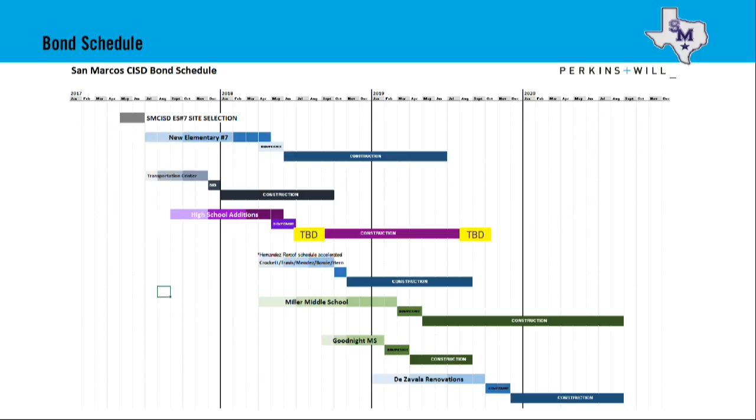With Miller, like I talked about, we're really jumping into the phasing. So this one's a tricky project. As you can see, the front of that building looks completely different. How are we going to address the front door? How are we going to address parking? Where does staff come in? Where do buses come in?

So we're starting to have initial conversations with the contractor. And then we're going to schedule a meeting and talk about that with campus staff and really start to dive into that, because this one is probably the most extensive on additions and renovations. We're demoing a portion of the building, so where does administration go? Some of those things that we need to jump into.

So by next month, when we give our design development presentation, we'll have a little more of that refined for you guys. I think the biggest thing is we've been meeting with the city quite a bit, making sure they understand the scope of work, so that when they're reviewing the drawings for permits, they know what's going on.

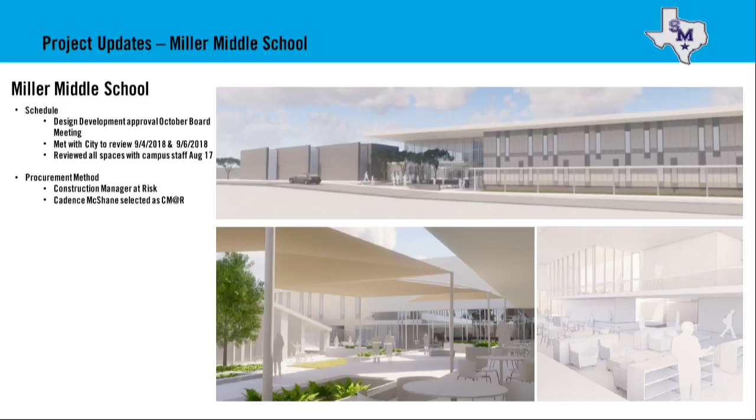And we had a great design development meeting with every single department. We went into the layout of lockers. We got into a lot of the details - the layout of all the science rooms, where the sinks sit, where fume hoods need to be, where safety showers are in science labs. So we really got into good detail on that, and we'll be able to show you more next month.

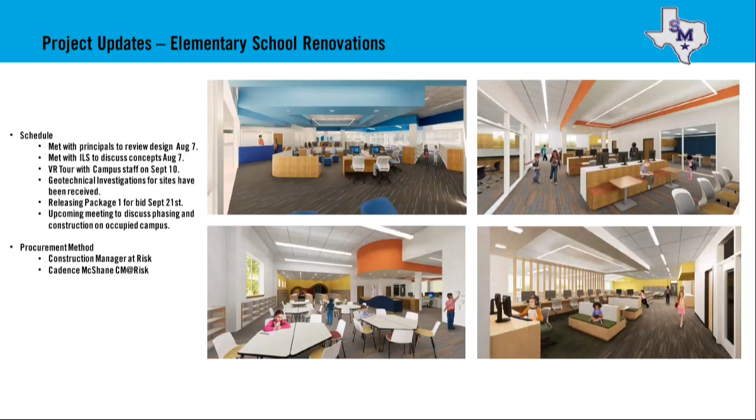Project updates for the elementary school - I'm going to present the design development package tonight, and I'll get into that one in just a moment.

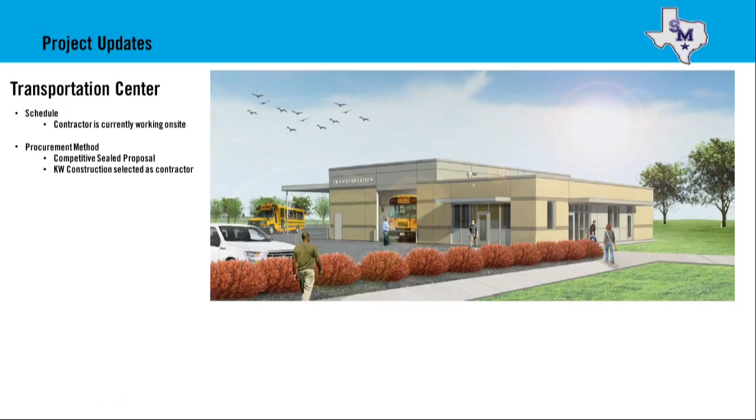And then the Transportation Center - KW Construction couldn't be here tonight, so I'm just going to give a brief overview of where they are. I tried to get an overview of the site. You can see most of the concrete parking for the buses is already in. They've been delayed by rain quite a bit, but you can see they're still trying to make progress on the exterior. They're getting all the flashing and everything ready for those windows in that picture there. That black portion, that band, is a metal panel band that'll be going on next once the roof is fully installed, so they're still making progress.

And Cindy and Jay have been going to every single job site meeting. They know what's going on out there, so they've been really on top of it. And then I'm going to let Weber come up here. We'll let them come up - you want to come up and give a quick update? Okay.

Were the easy ones this time? That's us.

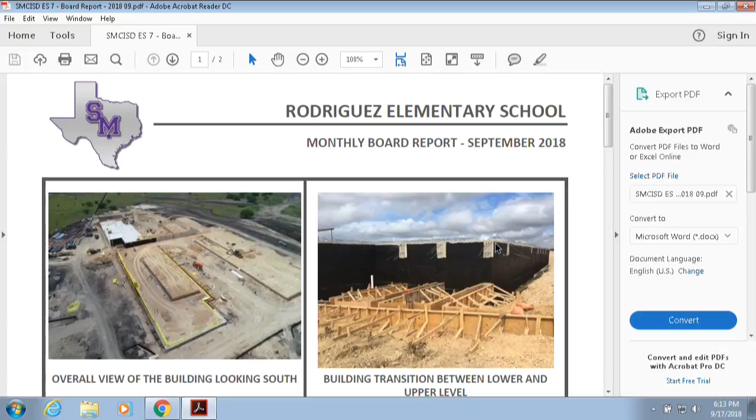So, yeah, just right quick - what you see on that picture on the top right is the building transition between the lower and upper level. We started the waterproofing and the French drain. The forming is actually for the stiffeners and beams that tie the wall to the upper level.

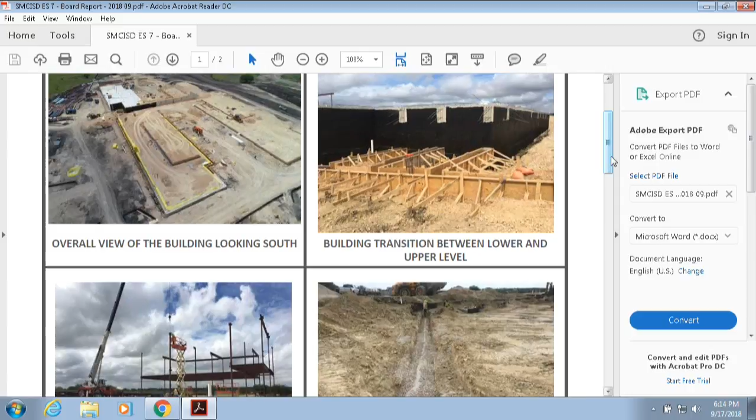And then on the 2-story level structural steel, we've been able to get about 42 pieces of steel a day, so moving pretty good. Have you been out there recently? Yes sir, we're out there every day.

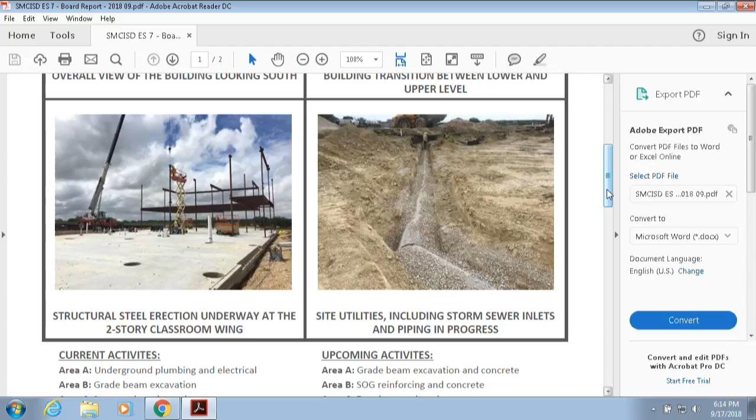Were there any surprises in how the site took water? For the most part it's draining and doing what it should be doing with our temporary erosion controls. We did do a rough cut of our parking lot up close to our construction trailer, so that did hold some water, but we've been out there pumping Saturday and Sunday.

I guess the storm that came through yesterday didn't really help, but we've had multiple pumps out there pumping down towards the detention pond, the temporary pond. So it's still on time at the moment. Yes sir. All right, thanks.

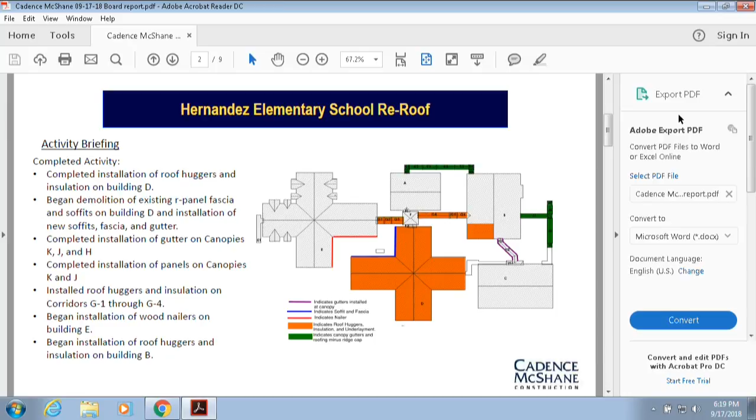Here's some pictures to give you an idea of what I just explained. This is building E, and the gray material you see is the membrane that's already installed. This is ready for the roof panels to go on.

Here I'm showing you the installation of the new soffits. If you recall in the previous picture, the soffits were blue. These are the new panels that go in, and this is the color that's been selected. Again, this is at Building D.

Here is the cafeteria. As you can see, on the right side of the picture there's a portion of the gray area, and on the left you see the panels that are on ridge, the ridge panels. This indicates we've installed the membrane on the right side and are working our way to the front of the building.

Here you can see the roof hugger system and the installation in the corridors, the connector corridors at G5 and G6.

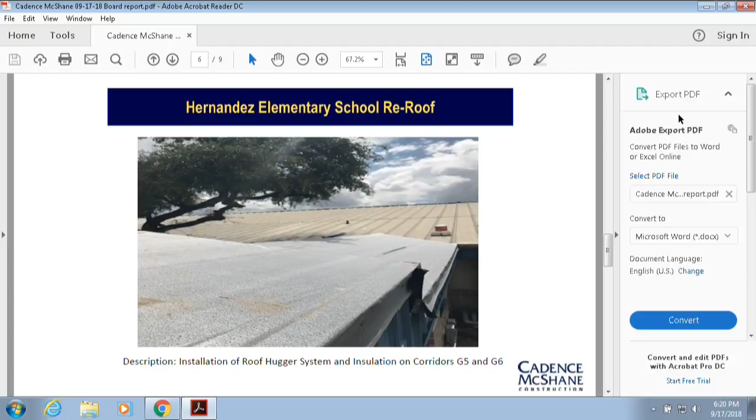Here what I'm showing you at Building E is the installation of the wood nailers. If you look above the blue trim, you can see the wood nailers being installed. That's what the gutters affix to.

Just to give you a briefing on where we stand on the schedule, we took a bit of a hit with the weather. The past week and a half, we've been working around the rain, and in working with the school on noise, we've had to restructure how we go about installing these panels, which has delayed the project just a little bit. So right now we're looking at completing the last building in early December. There's some cleanup and punch list work that happens after that, so we're projecting we'll be completely done before Christmas.

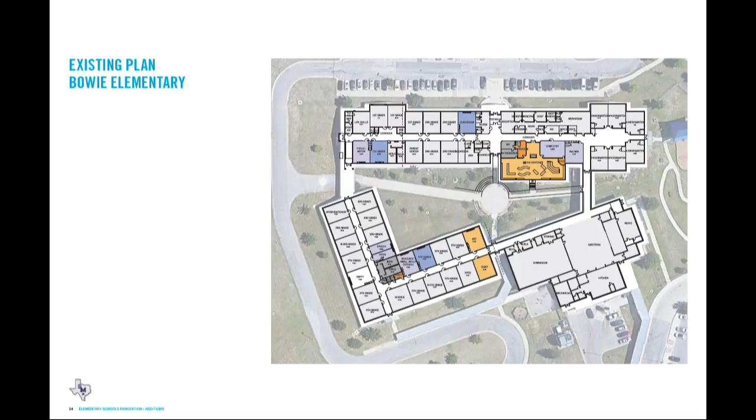Just a quick recap of each campus and the overall scope. At Bowie Elementary, we're doing a 4-classroom addition, in the top left-hand corner here. We're doing a full renovation of the library. Part of that renovation, and this goes for all campuses, is we're going to fully renovate the space, provide a community conference room, a maker space and lab, and also provide the same support spaces that we're doing at Rodriguez Elementary School, so everybody district-wide will have the same types of support spaces across the board. And then also creating a new art lab, a flex space, and some smaller intervention spaces.

We've always talked about being more efficient with the layout, so we're actually taking some of these larger classrooms and subdividing them so we can get classes of 4 or 5 without taking entire classrooms - we can dedicate that to larger classrooms. It allows more flexibility for principals and scheduling in the future.

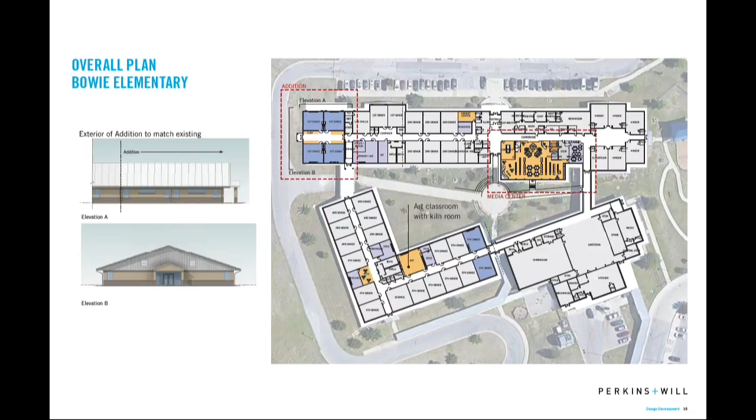In the media center, very typical across the board, we're creating that technology-rich zone. We have areas for our research computers, but also we work in groups now. The kids are not just going to be there by themselves. We're creating space next to each other so you can have two kids at one computer, with little bump out spaces in the middle so if I need to write something down, I can turn around and tell my friend, hey, write this down for your project. So we're creating it not just as a work zone, but making it more interactive spaces.

We also have our teaching spaces. Our media centers, our libraries are not just places for storing books and researching on computers. They're teaching how to research in those spaces. So we have a teaching zone as well that has a projection screen that can also be used for staff meetings. We have a large presentation space, more of that Kiva style space, where they wanted to create an intimate space where they can still read to students.

And then we have more of a personalized, individualized space in the green. Those are the little carrels or little nooks that the kids can climb into, get comfortable, and do some personal reading in a quieter space.

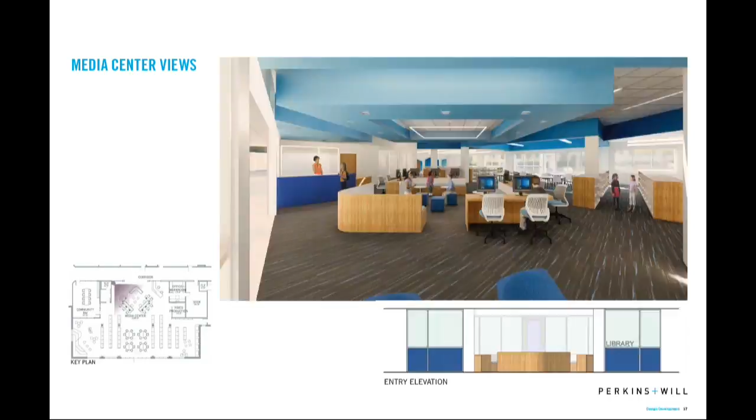And I think we can show you here in this view. So this front area here is that technology zone. We have our circulation desks still. And then in the back here, you can see some of where we're able to bring in some of those nooks. Here's a better picture of those little nooks - they're just little recesses that kids can climb up into and read. Here's our teaching zone in the front here.

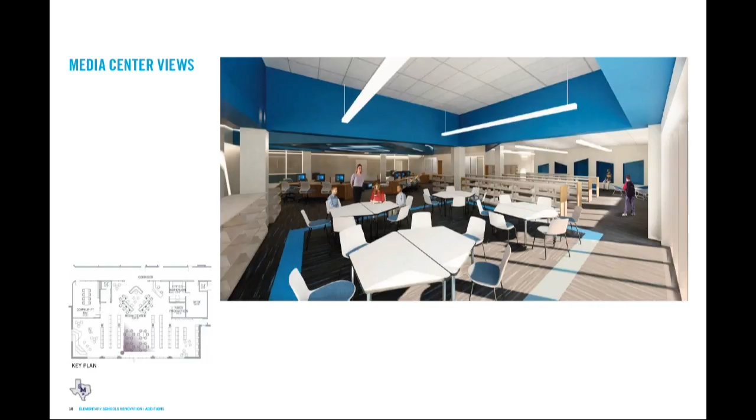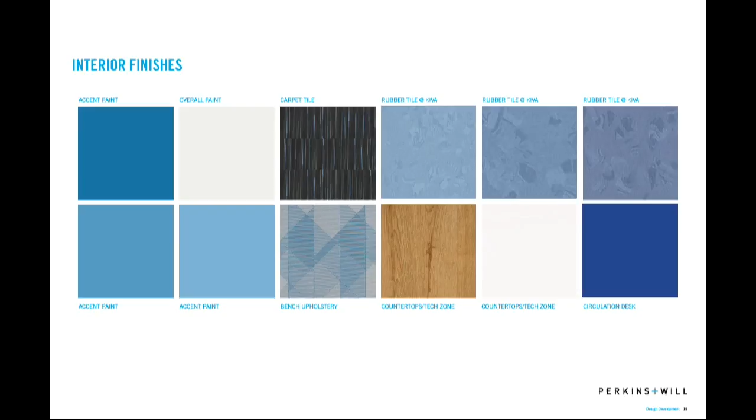And then really, I think the challenge - yes ma'am. Does that add or subtract or keep the same the amount of shelf space for books that we currently have in the libraries? We are keeping the same exact amount at each campus. And then the challenge is we have existing colors throughout the campuses, so really trying to modernize, make this an exciting space. It's not 'go to this space, read quietly' any longer. So we're trying to add a little more excitement to the space, but also be cognizant of the existing materials there, making sure we tie into an existing building.

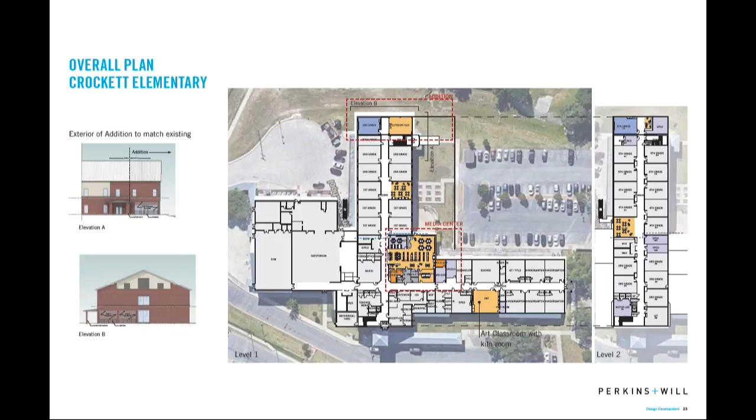At Crockett Elementary, we have a classroom - we have 3 classroom additions at the northern portion, and this one's different, it's going to be a 2-story addition. We actually have an outdoor covered space on the first floor, so they can break out and have an outdoor class space that has some shade and rain protection. We're creating some flex spaces in the first floor and second floor so they can break out into those spaces. Full renovation of the media center or library, and then creating an art space with the kiln in there as well.

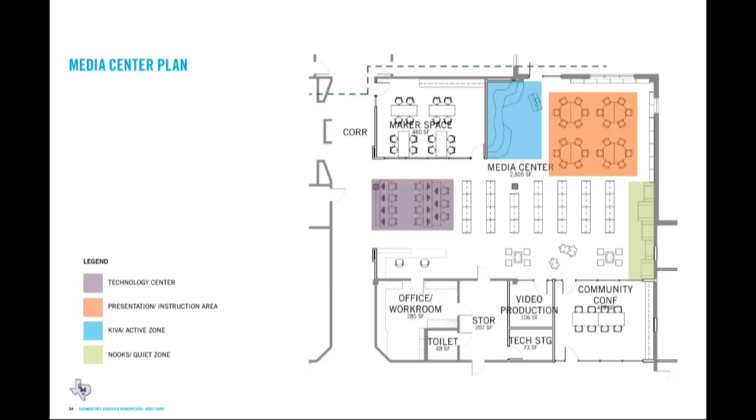Here we have our entrance off of this main corridor. Here we have our kiva, our more public presentation space, our teaching space, our reading nooks, and then our circulation desk and support space. Here we have our community conference room off of this area, which is really close to the front door - easy access, you don't have to go through the library space - and then our maker space off to the north. So this would be more of that entry off the main corridor, with our teaching space. We're standing kind of on the kiva, you can see it in this lower corner, and then we have our little quieter reading spaces there.

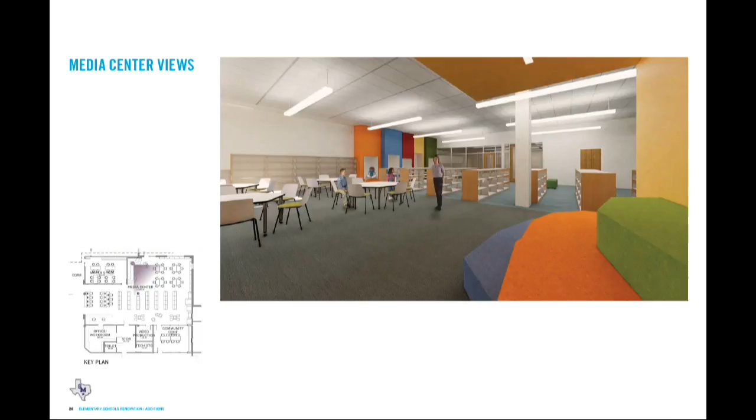And then at Hernandez, the layout makes this so much fun. It's a challenge sometimes, but at the same time, I think it actually helped out.

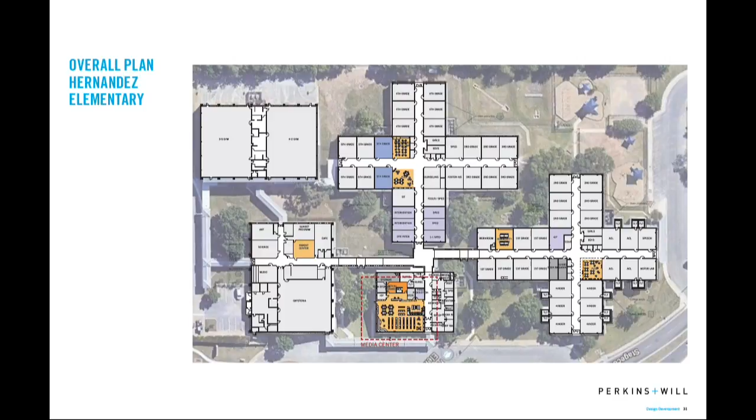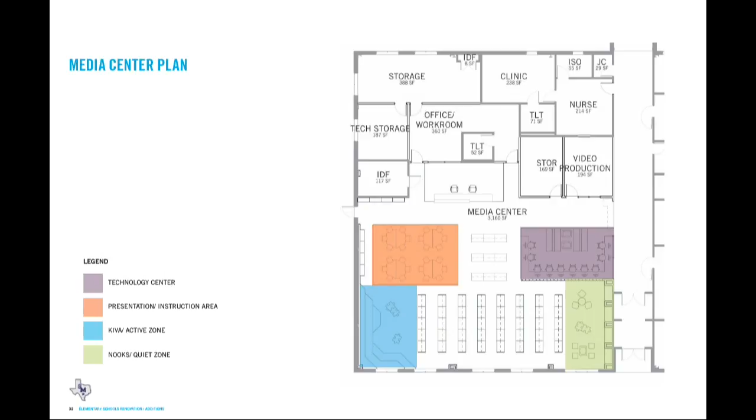Our community room is off of this wing here, and then a full renovation of the library center, which includes our entrance off of here, our technology center, our teaching zone, our presentation space, and then our quieter space off of there. Here's our technology seating area with some informal seating, kind of like a little booth where kids can sit and take notes with their partners.

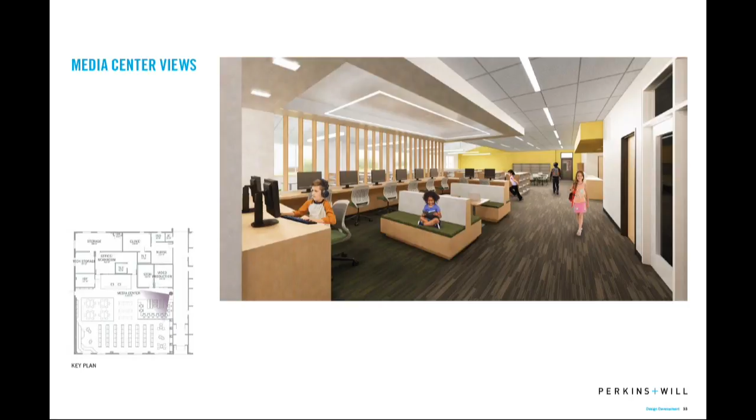Once you get inside, if we're standing on the kiva looking back, you can see we have our reading nook areas, and then keeping our stacks as they lay out. I think the great thing about this layout is that the circulation desk is right there in the center, so she can see everything that's going on. It worked out really, really nicely.

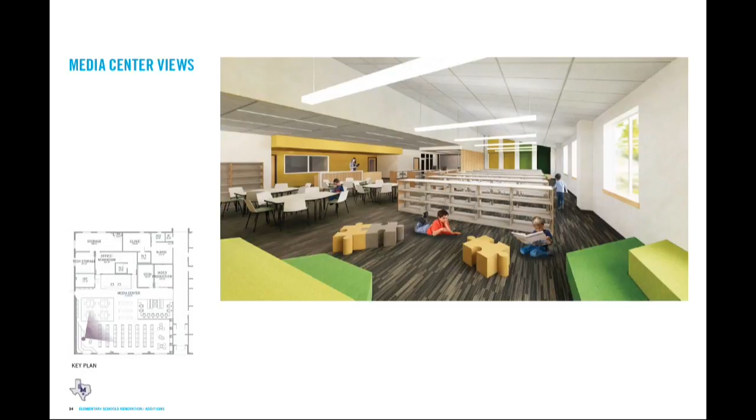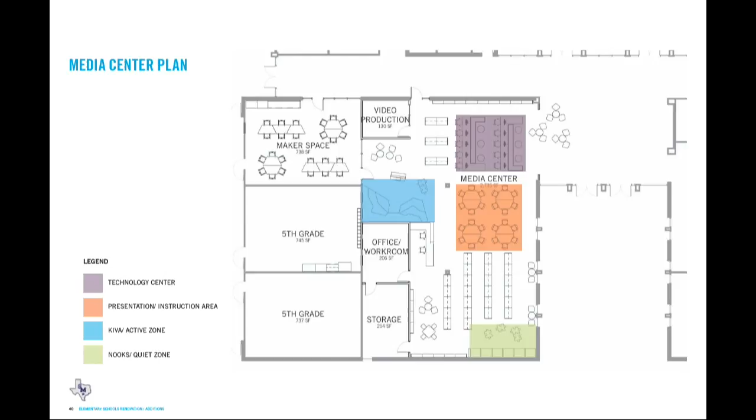And then Mendez, no addition at this campus. We're actually creating flex space here, here, and here, with our community space here. In our media center, we have our technology zone as you walk right in, our presentation space right off of here, our teaching space, and then our quieter, intimate space. We also have our maker space here off of that 5th grade hallway.

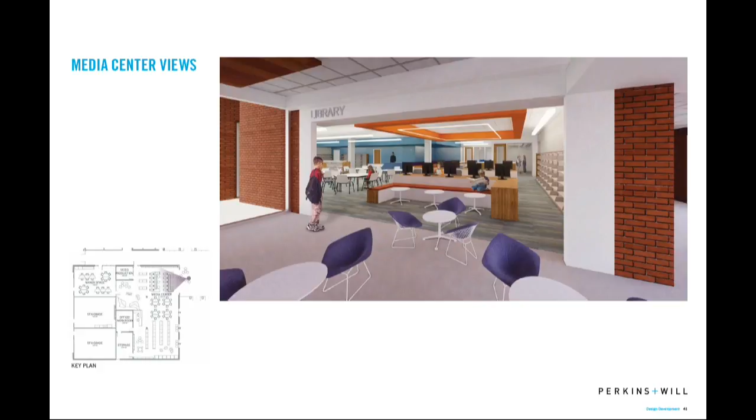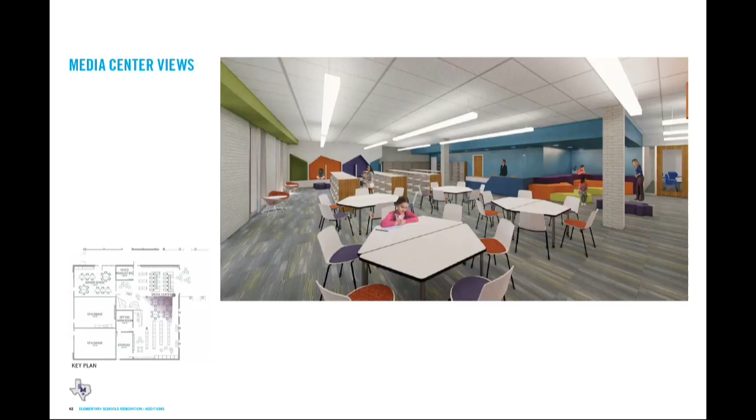Just an example of what it could look like from your entry. This is right as you walk in the school, and you look left, and then as you walk into the space, you see the kiva, the cubicles or nooks, and then our teaching zone in front of us.

Now something- oh, and Travis, I forgot. Sorry, Travis. Travis, we have a 4 classroom addition on that kindergarten wing down there, and as part of the bond, we were picking up that playground, purchasing a new one, and moving it further down. It worked out really well the way that this addition comes in.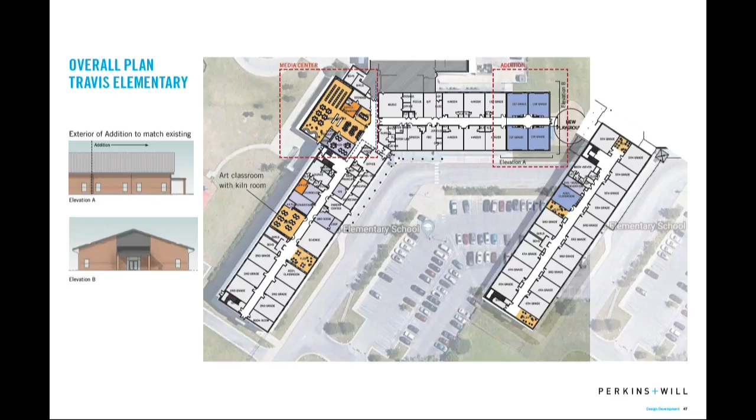Creating our flex space, our art in each hall, so first floor and second floor. We have some different sized flex spaces on the second floor, and then a larger one on the first floor, trying to give a little bit of different types of spaces for this campus. And then we have our full library renovation space, again coming in with that technology zone, our circulation desk, our maker space, community room, and then our kiva, our teaching zone, and individual reading spaces.

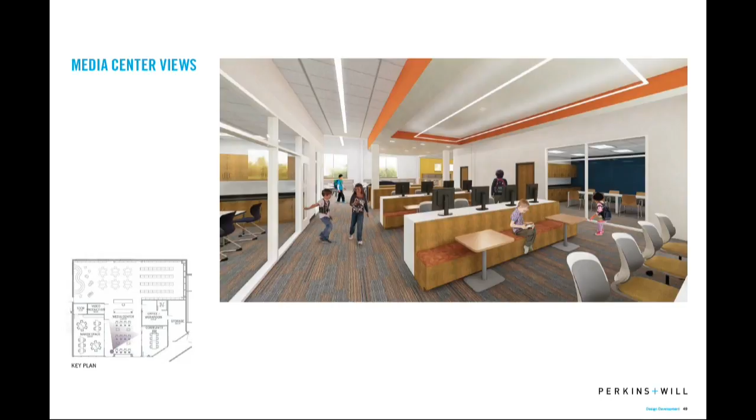Just some examples of what that could look like in the space. So this is right as you walk in, and this is kind of standing on the Kiva looking back towards our reading nooks there.

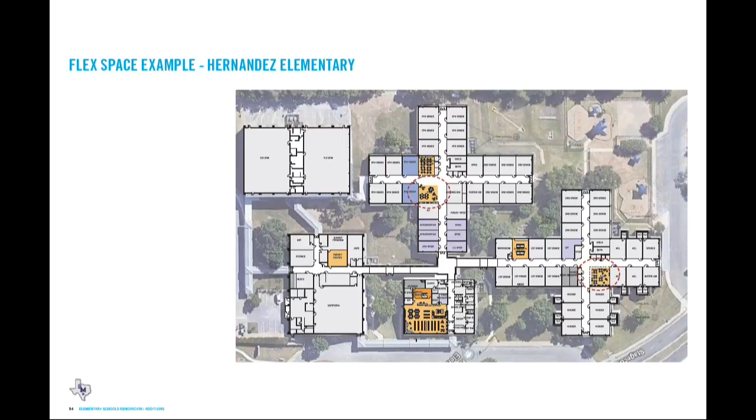And then I skipped over the flex space, I wanted to dive in a little bit deeper. They all have pretty much the same types of spaces. We want it to be able to be flexible, technology rich, making sure all those walls you can just break into groups. You can have 3 or 4 different groups, they each take a wall, they can write on the walls, they can do whatever they need to do in that type of space. Place for individual seating as well. We're really trying to make it a flexible space. We don't want to have too much built in, because once you start building things in, it just locks down the use of that space. We don't want to hinder any future use of those spaces.

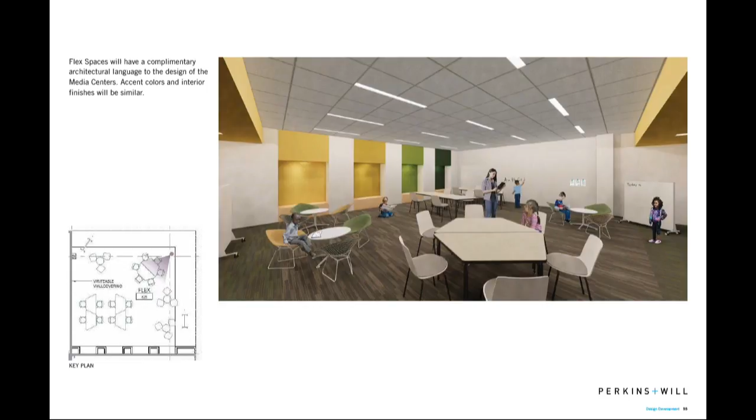That's all I have for the elementary schools. Any questions?

I was wondering if you could let me know how many seats we're adding at Travis, at Crockett, and at Bowie, please? How many seats were added?

At Travis, we have an additional 48. I have all this data, and if I can get back to you, I'll spell it all out and show the comparison from the bond planning. We have all the existing capacities and the new capacities per the bond.

That's what I was interested in, yes. But it was 4 classes at Travis, 2 classrooms at Crockett, and 4 at Bowie? It was 3 classrooms at Crockett and 4 at Bowie. Yeah, if you could pass along that increased capacity, that'd be great. Absolutely, thank you.

Any other questions?

And then we have our design development update for the administration building.

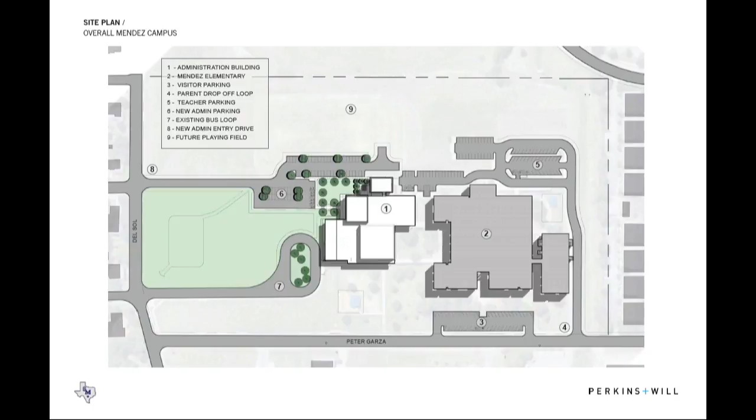And I can show you here a picture in just a moment. So here, coming into this main entrance right here, you never leave this zone when you're coming in.

So your approach, you know where to go. We're going to have some signage at the road at the intersection as well, so you know elementary school this way, administration this way. And I think from that front picture, really creating that very visual picture. As you drive by, you know where to go if you're going to administration.

And this really hasn't changed a whole bunch since we presented to you last time. We still have superintendent and marketing communications down in this zone here. We have training and board right off the main lobby.

So we're able to allocate types of spaces. You're not having to go through any other space to get to these spaces. We can lock down the rest of the building at night, so the public doesn't have to walk through administration zones. And it just simplifies a lot of that circulation pattern.

And as much as they use the boardroom and training here, we don't have to worry about people wandering through the building. Even for staff, teachers, they know exactly where to go when they come to the main administration building. Here we have HR is up here, finance is here.

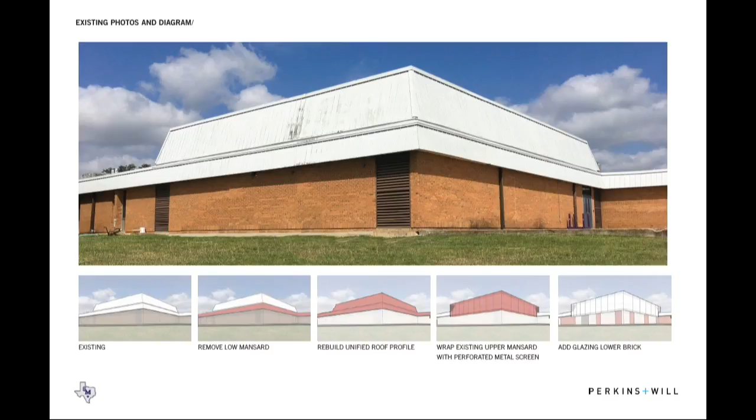As part of the scope, all of this band around the entire building gets torn off, and we're actually removing the lower portion of the roof. This entire lower portion is all getting stripped off down to just the joist, so we're putting new deck, new insulation, new roofing materials, and bringing it up to our current energy codes for this project.

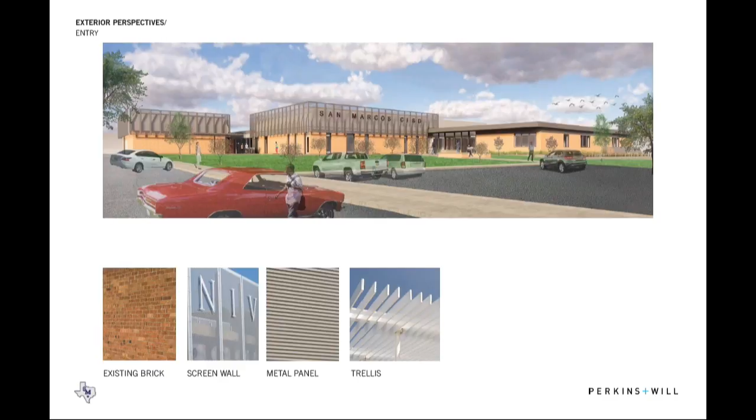And just a quick view of what it could look like as you walk up to the building, creating this screen here along the front. Here's our main entrance, kind of creating a nice landscape entry with some outdoor seating. If you're waiting for a friend to go into the board meeting, you have a place to sit. But also thinking about the staff, creating some outdoor spaces for them if they want to go outside and eat. We're trying to get people to move, get up, be healthy, so we're trying to offer some of those types of spaces for staff.

And you can see this is kind of a covered seating area to encourage movement.

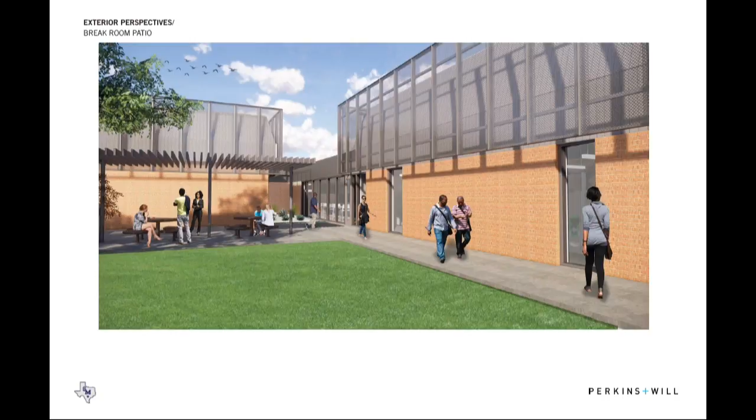And then really focusing on our finishes, bringing in San Marcos purple, bringing in those logos, making sure they're meeting our communications department's requests.

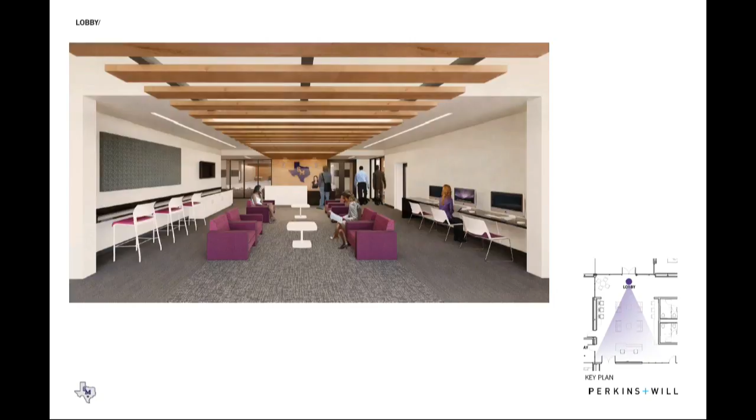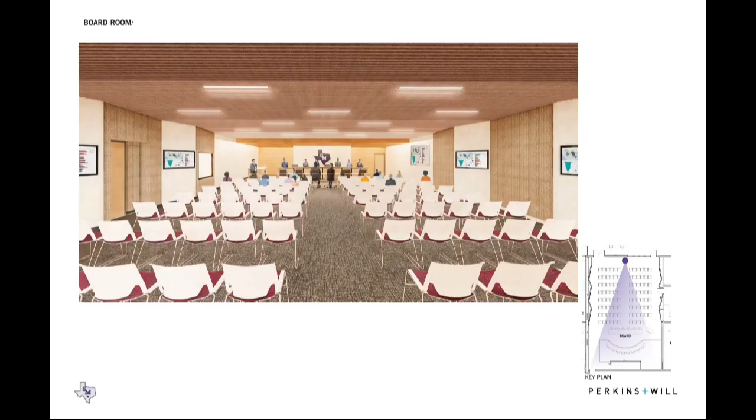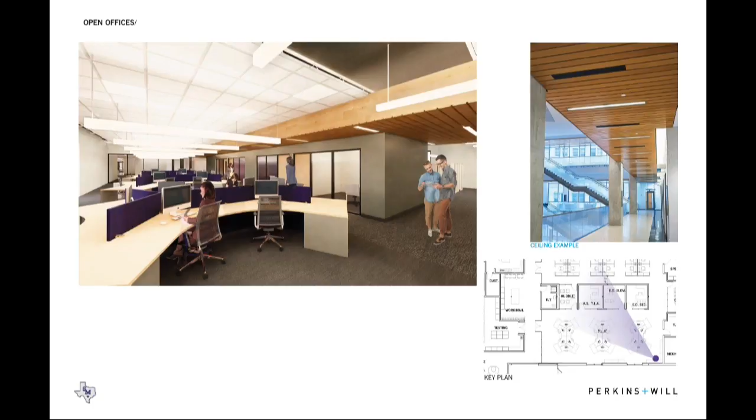And that time I'm done.

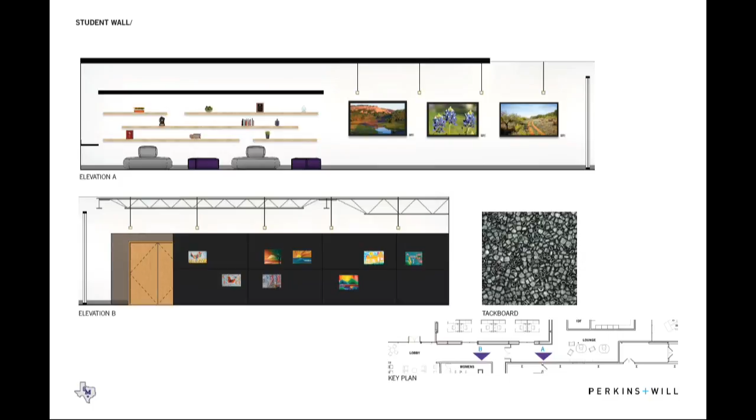So the admin building is completely separate from the Mendez Elementary? That is correct. There's no way for funding to go back and forth? Correct, all funding will be totally separate.

I understand the funding's separate, but are the physical buildings actually separate? There will not be a passageway or hallway between the two. That is correct. So right here there's a wall that separates where kids come in and leave. You'd have to physically leave the administration building and go all the way around to get into the gym. That is correct.

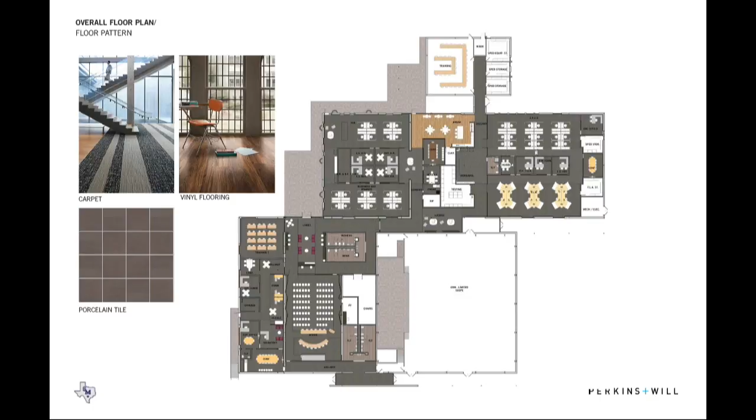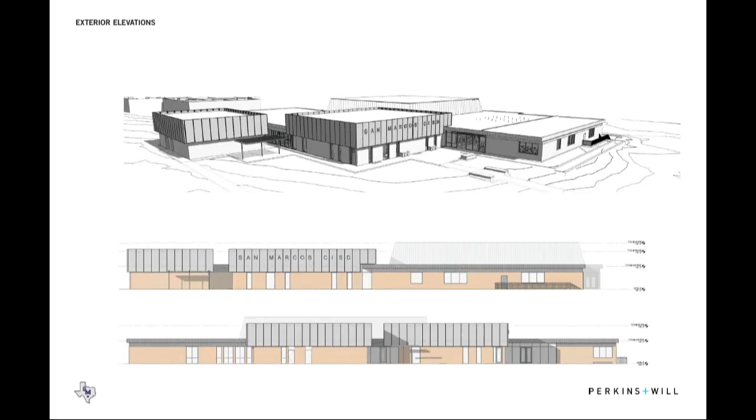Okay, thank you. Looking at this page, for the orientation of the facade - so the signage faces Peter Garza, correct? Yes. But the entrance faces Del Sol? No, I'm sorry, the entrance is on Del Sol. The signage is off of Del Sol. So the address, if the city allows us to change it, will be Del Sol, not Peter Garza.

So then around the corner, that's Peter Garza? Right, the front of the building is Peter Garza, but over here, Del Sol is kind of behind it. So the entrance is in the back? Yes ma'am, off the side street in the neighborhood. Del Sol is here, and that signage is right on the face of that wall, so as you're driving by you can see it.

And we don't want the signage on Peter Garza since it's the more main thoroughfare? No, we're trying to keep the school totally separate. Keep it separate. Okay.

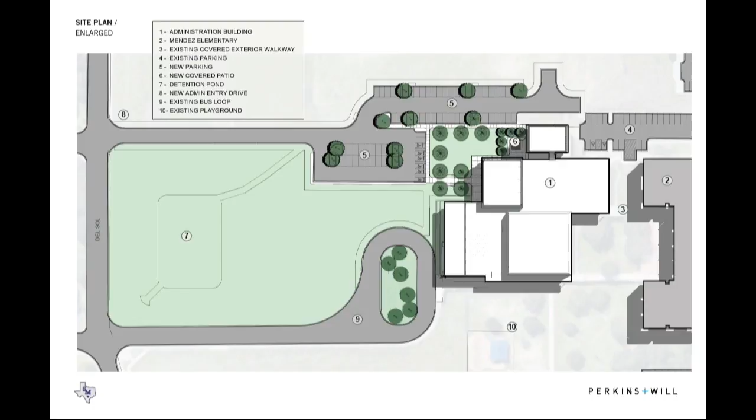And then is there an entrance off the boardroom? I can't tell, it looks like double doors. So in the boardroom, you can actually leave out the back and go directly into the conference room. And there's a hallway back here you could leave from. There is a back way in. Okay, and that's just due to fire egress.

My next question is for the Superintendent - the current budget is 4.5 million? And the board voted... what's the current estimated square footage? I can't remember, it's around 26,000 square feet. For everything you've presented tonight? Yes.

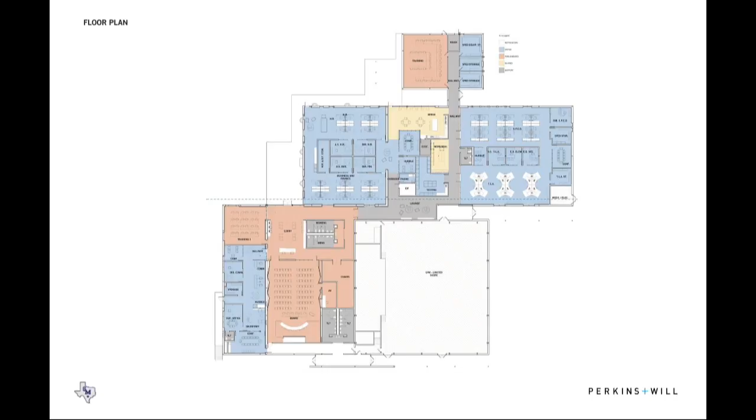Thank you. Any other questions? Thank you, Coleman, thank you very much. Never mind, I'll do it later.

Next is the district rezoning timeline.

I handed out in your packet the district rezoning timeline. I don't know if anybody has questions or if you want me to go over it. I'd appreciate you going over it.

What we have done: we met with Templeton and got a first draft using the spring numbers. We took those numbers and did estimated boundary changes to incorporate the new elementary school, Rodriguez Elementary. On July 19th we presented the new zones to the principals for feedback. On September 13th we sent updated numbers to Templeton to include our fall data. On October 11th they'll come back with numbers showing how those boundary zones would affect children currently in school.

On November 5th we have agenda prep, so we're suggesting a board workshop to go over the plan, not saying it's finalized. Then during December through February, we'd like community parent meetings at all elementary campuses since every campus will be affected, including elementary and secondary. High school and Bonham won't be affected since they're district-wide anyway.